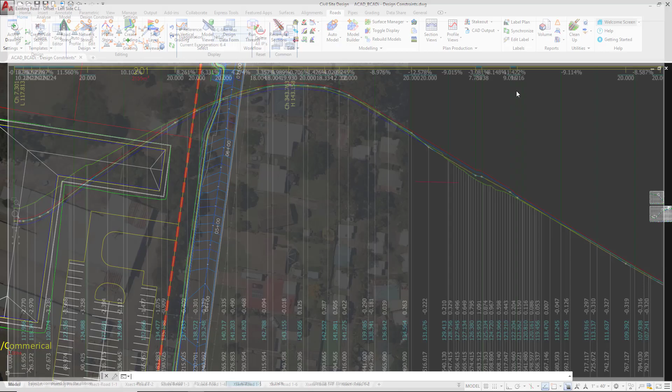Let's now see what happens if we were to adjust where the constraint was coming from, which would be the existing road centerline, and see how we can then manage the constraint. So close down the vertical grading editor. We're going to open up the vertical grading editor for our existing road. And I'm going to make it full screen.

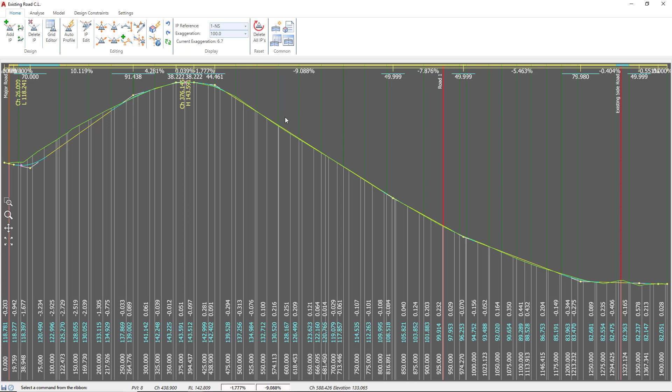Now this is our existing road, and what we should be seeing is the centerline level of our design matching onto the existing surface. So I'm going to right click, generate a cross section. Just going to move the VG screen off to one side. You can see where I've generated that cross section, we actually have the -5%.

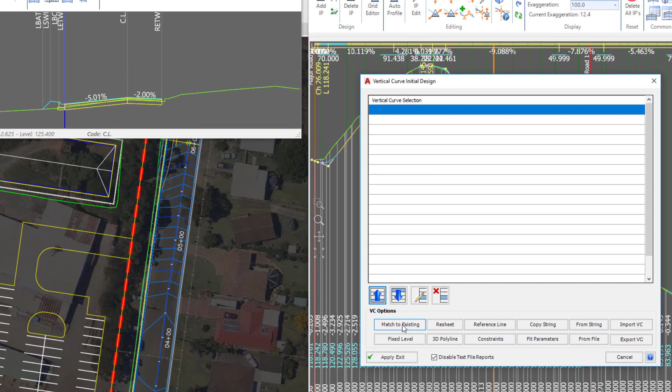What we're going to do is, using Auto Profile, get the software to match the profile onto the existing surface. So we're going to click on Auto Profile. There is a tool called Match to Existing, which will allow us to match our design to any surface. And we're going to say from 0 to 100,000, match to, and we're going to choose the pasted surface.

You may remember when we used the grid editor for our first grading string, we were able to match the design onto the sampled surface. Well, this sort of does something similar, but what it allows us to do is to help refine this matching with a design. We can then ask the software to apply the same fitting that we just applied for the design constraint. So we're going to click on Use Fitting.

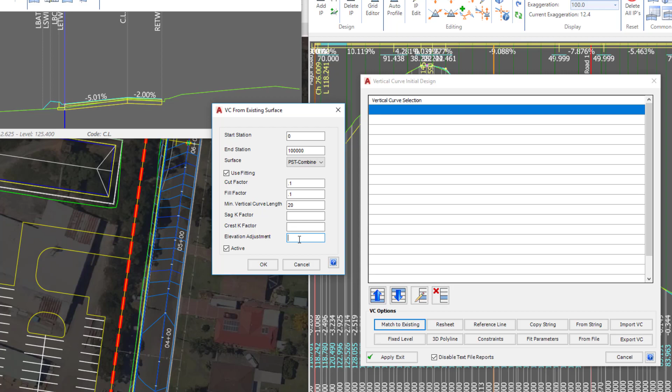We're going to put a cut factor of 1, a fill factor of 1, then a minimum vertical curve length, and we're going to say in here about 20. You can also add an elevational adjustment, so if you wanted the software to match onto the surface, then add or remove a certain amount, we could do that. We're going to click OK, then apply and exit. So the software will have done its best there to change and match onto the pasted surface.

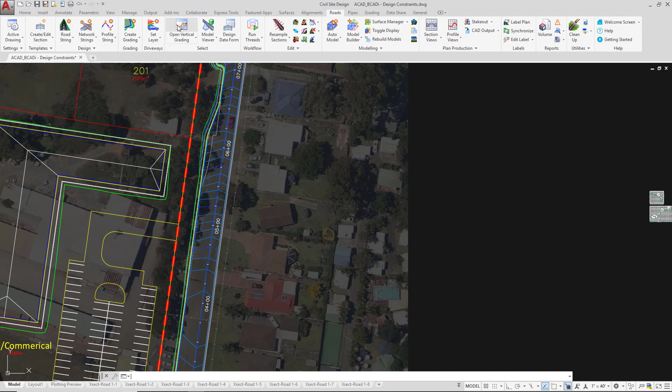Let's now see the implications of that on our profile string. So let's close down the vertical grading editor, close down the cross-section window, and open up the vertical grading editor again for our profile string. So clearly, because we've just made that adjustment, the PVIs of the profile string are no longer matching up to the -2 and -5% constraints.

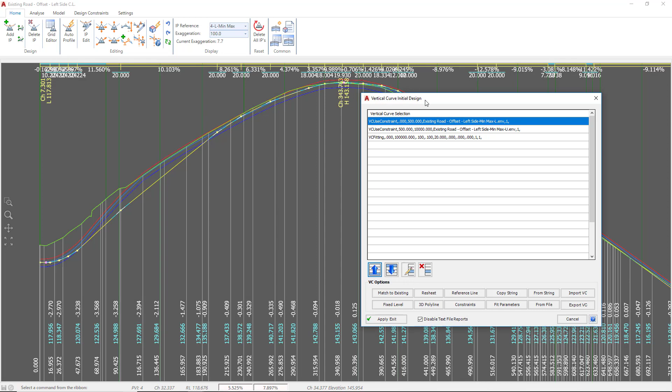So all we do is go back to Auto Profile. When we click Apply and Exit, we're actually telling the software to re-reference the constraints and tidy up with the fitting. So we're going to click on Apply and Exit. And you can see we're now matching back to the -2% for the first 500 feet, and then to the -5% for the remainder of the design.